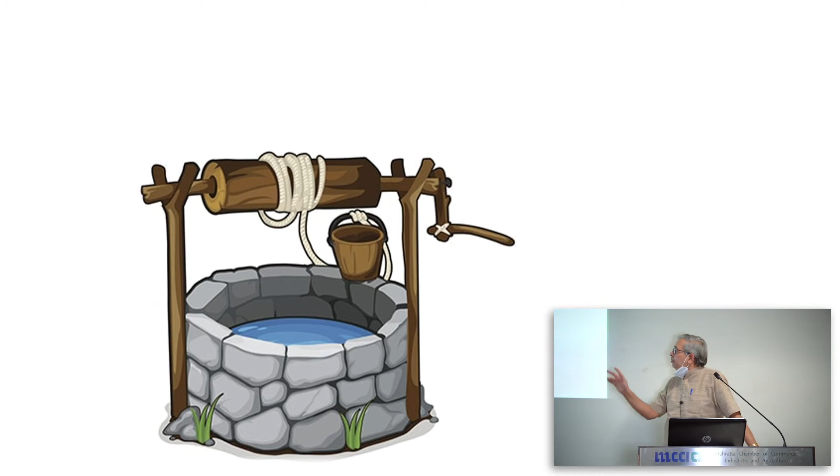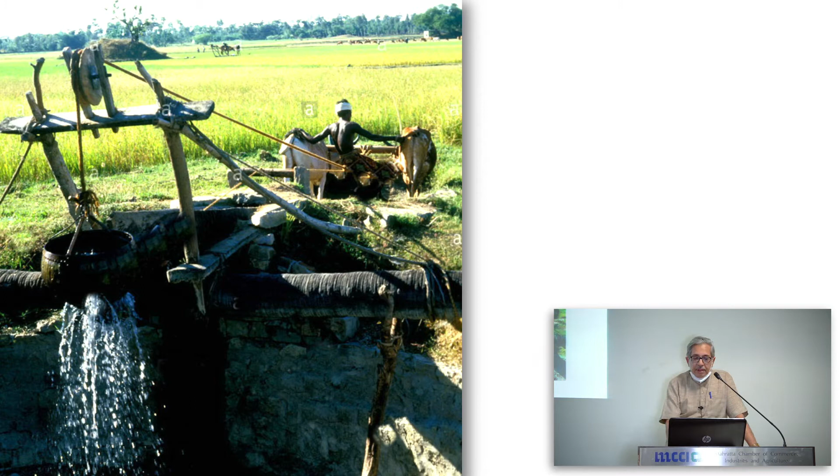If you remember, once upon a time, drawing groundwater was done by a manual method, one bucket at a time. This was the norm. Then for agriculture, oxen were used for drawing the water from the wells. Quantity increased. Then came this machine, a rig, which is, I think, one of the easiest solutions for drawing water. Wherever you want groundwater extracted, you call the rig, they'll put a hole, maybe 100 feet, 200 feet or 300 feet. The bill of the rigs goes up if you go deeper, because the rate is calculated by number of feet.

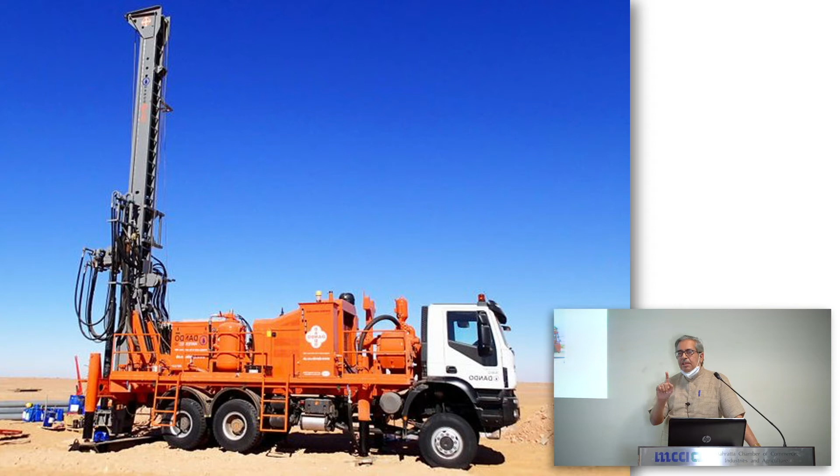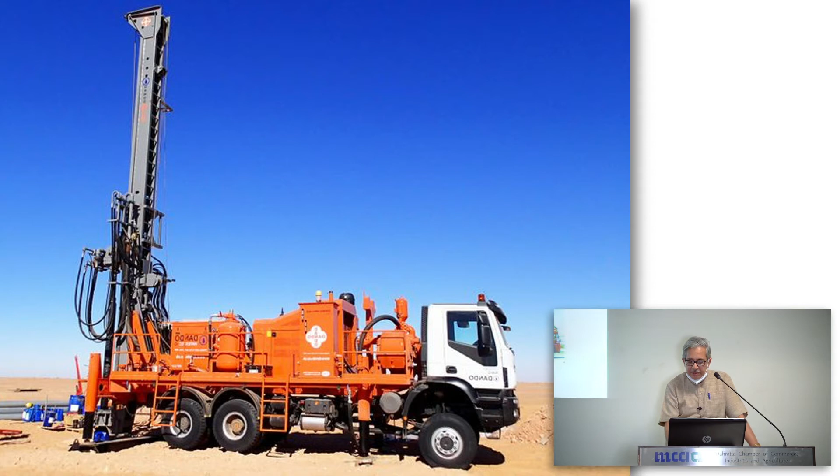If you have a 100 feet borewell, charges are less. But if you have 300 feet, charges are more. So obviously the rig people will encourage you to go deeper and deeper. The borewell is an easy solution for water. The moment you have a borewell and a motor pump on it, you will have a continuous stream of water. In the farm sector, you will find 5 to 6 borewells on just 2 acres of land. If you have 5 hectares, you will have 10 to 15 borewells. I have seen 20 borewells in a 5-hectare land.

This is happening because they drill a hole here, they get some water. Next season it is dried out, so they move, put another hole there, and try to extract water. This way, they are actually emptying out all aquifers. Why? Because, as Dr. Deshpande said, the more water you get, the more cash crops. Instead of being a bajra or jowar farmer, if you have got sugarcane, you are richer. And so the quest for water goes up.

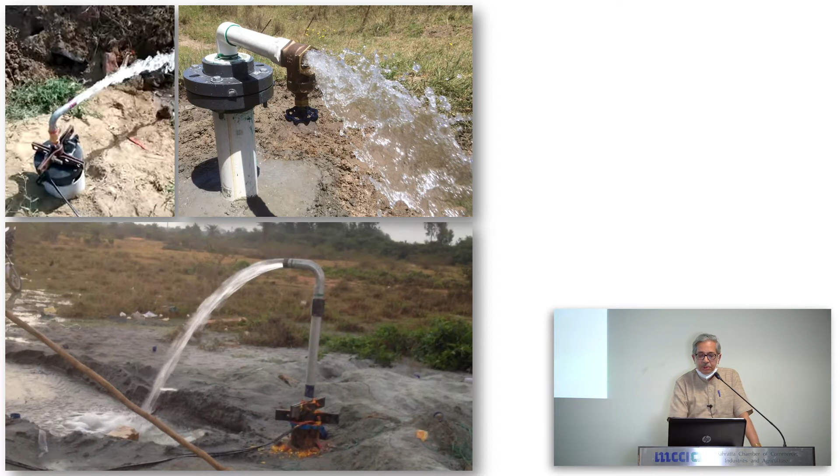Now the same phenomenon is explained here. Look at this. When you had a dug well, the depth was not more than 30-40 feet. Then we had borewells, going up to 150 or 300 feet. And later on the deep borewell, sometimes even 500 feet, or as in Bangalore, 1000 feet. Look at the aquifer levels. When you are using a dug well, you are extracting water from the superficial or upper layer of the aquifers.

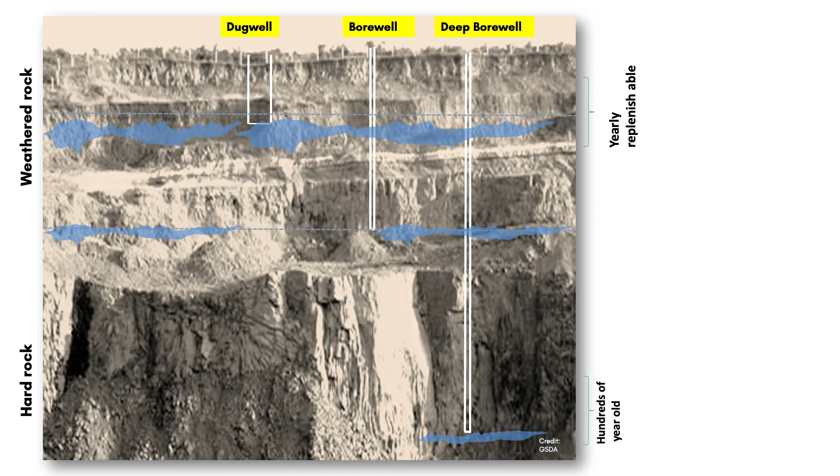But then you get deeper and deeper. My next slides will tell you how it is replenishing. This gets replenished every year. This doesn't. This kind of layer of aquifer might take sometimes 100 years to get replenished. In fact, in Bangalore, they have hit aquifers which are replenished in something like 500 years. And we are trying to empty out everything down there, trying to make everything dry.

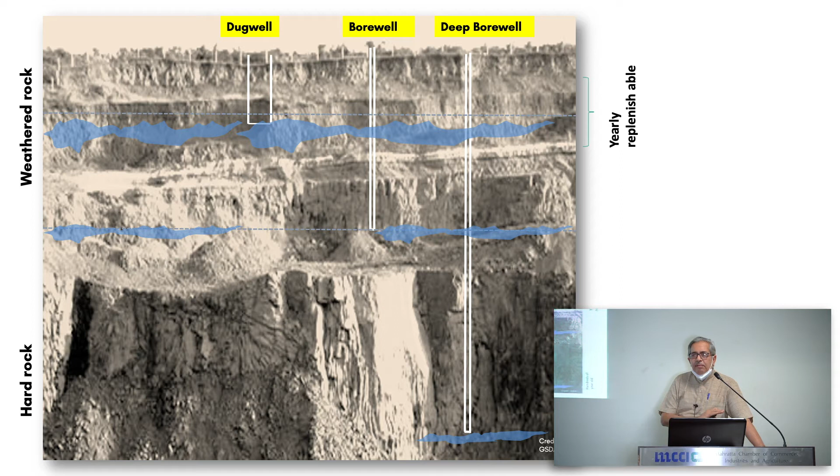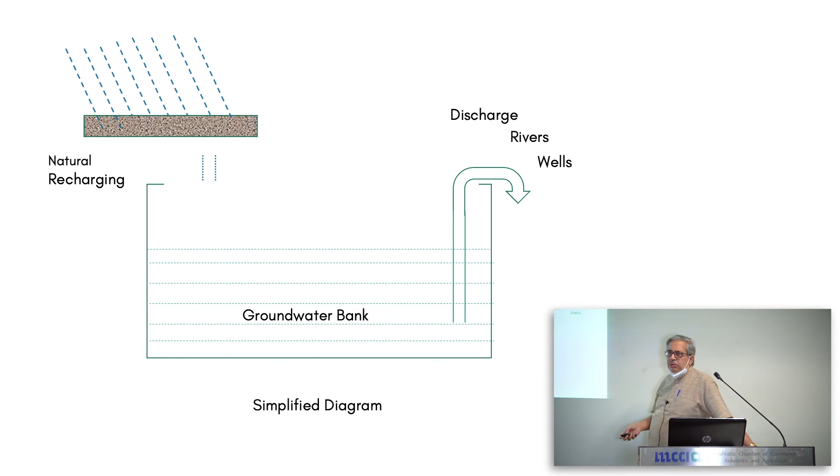Now you imagine that the groundwater is like a bank. What happens? Earlier it was only natural recharging. Look at this, rainfall is very heavy, but actually the water that goes into the groundwater is very small, not more than 15%. And the discharge was through the wells and rivers. That was manageable. The balance was always there.

But this doesn't last forever. Shailaja would be interested here more. The recharging of the rivers is not only because of the surface water, it's also because of the groundwater, which gets replenished over decades, centuries and millennia. And this is all water which actually makes the river flow round the year.

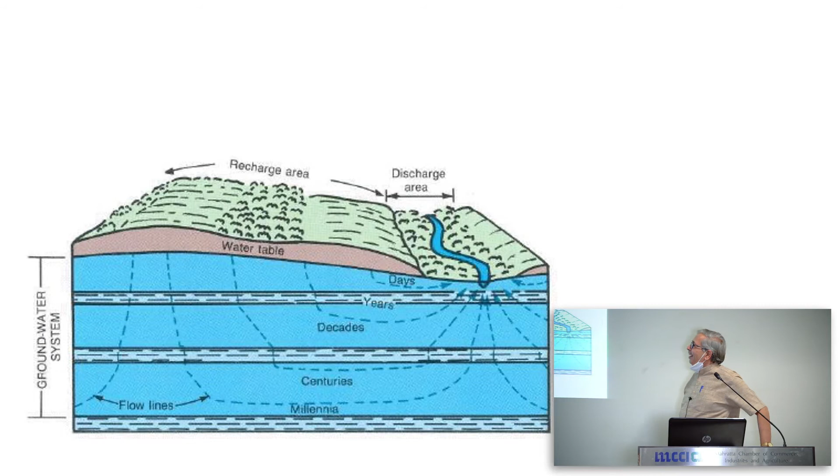Many of us would remember that just 30 years back, Pune had rivers with flowing water throughout the year. And today, there is only a trickle from February or March onwards, if we are lucky. Otherwise not. The situation is the same in almost every city. Go to Yamuna, the same thing is happening there. So this is the situation.

In fact, Mithi River in Mumbai, same thing. It's not flowing throughout the year. Only when there is a heavy downpour does it come into the newspapers. Otherwise not.

In Maharashtra, we have a very peculiar situation where basalt rock is everywhere. I am mentioning this because basalt is a non-porous rock which is laid almost all over Maharashtra except Konkan and some areas. What makes this situation tricky is that this prevents recharge of groundwater. When recharge happens from the heavens, from the rainfall, basalt prevents it. It's completely non-porous. It's impermeable.

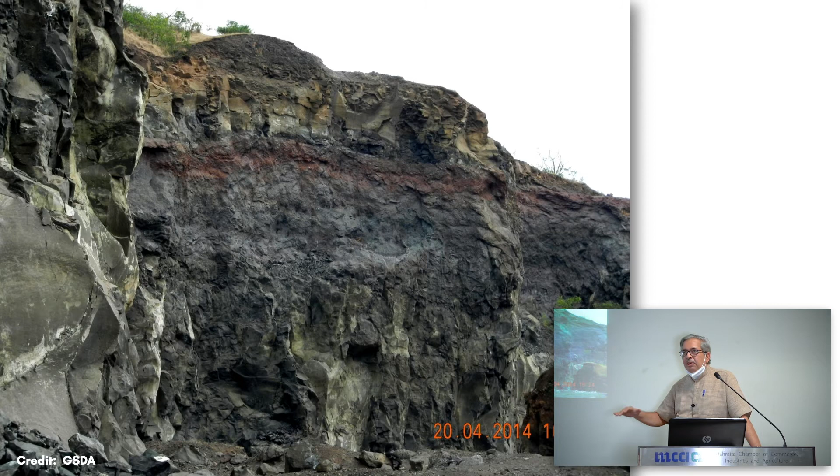Despite this, some recharge does take place because of the weathering of the rocks. That means the rock becomes brittle. Sometimes cracks develop, and because of this, the rainwater trickles down. Remember the word here, trickle. Even though there is a flood of water on the surface, nothing goes beyond the basalt except a few drops. Through the cracks in the rock, the water may go down. These cracks are more visible here.

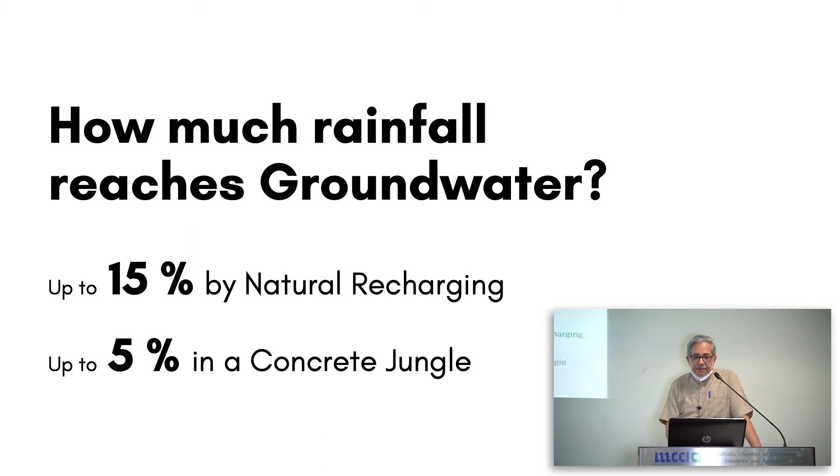And here is the stat. How much rainfall reaches groundwater? By natural recharging, 15%. But in concrete jungles like Pune and Mumbai, cities with concrete roads and concrete buildings, 85% of the city is covered with concrete. When this happens, the recharge in these cities is only 5%. Which are the obstacles? Obviously the buildings and concrete roads, which are impermeable.

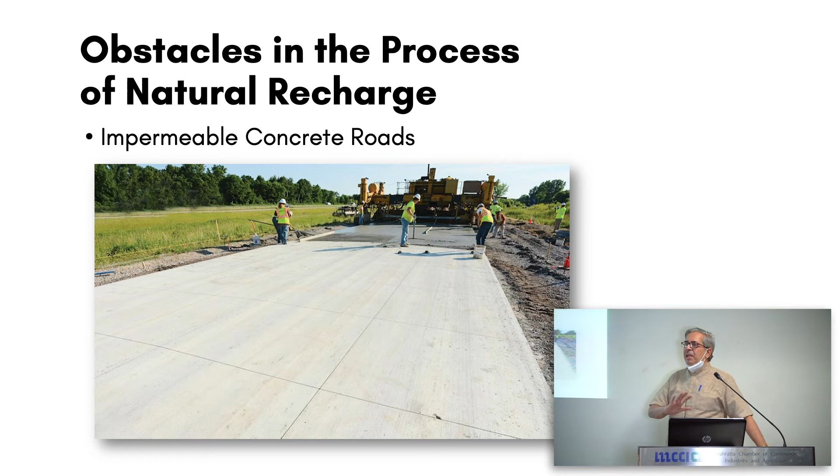This is also the reason why there is flooding every rainy season. We are not allowing the water accumulating on the concrete roads and inside the societies to go anywhere. I have seen hundreds of societies where even their internal roads and open spaces are filled with concrete. I asked, why is there no soil left in the society? They said, in the rainy season there is too much water, our feet get muddy and dirty, so they want concrete there. That makes the case complete. That will not allow any water to trickle down.

And on the other side, we are extracting water from this layer, from dug wells, from bore wells, from deep bore wells, and we are extracting water from a level where the recharging has been happening for centuries.

They, आपल्याकडे इस्टेट असते ना आई वडिलांची, which your grandfather's grandfather has earned and given you, like real estate or gold, and in one generation एक असा सवाई मुलगा निघतो that he tries to sell off everything, all the gold and all the real estate, and just enjoys, because he can't earn, so he throws it away. All of us are doing that. The entire population of India is doing this.

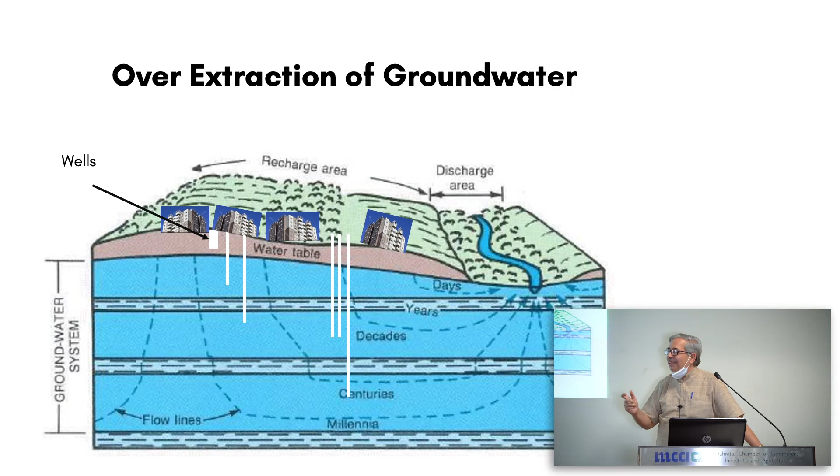So we are trying to draw out all the water which has been collected over centuries and millennia, and we are desperately trying to be completely poor, completely poor. And we are not realizing it, we are just not realizing. We are getting broke, actually, that is the correct word. We are getting broke.

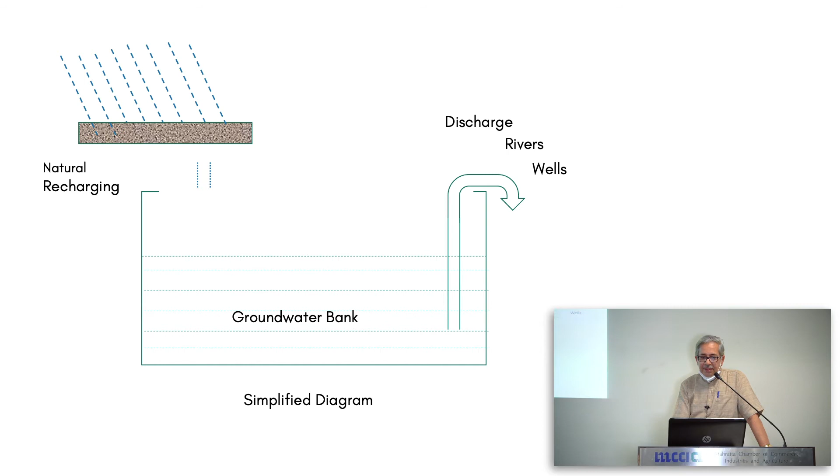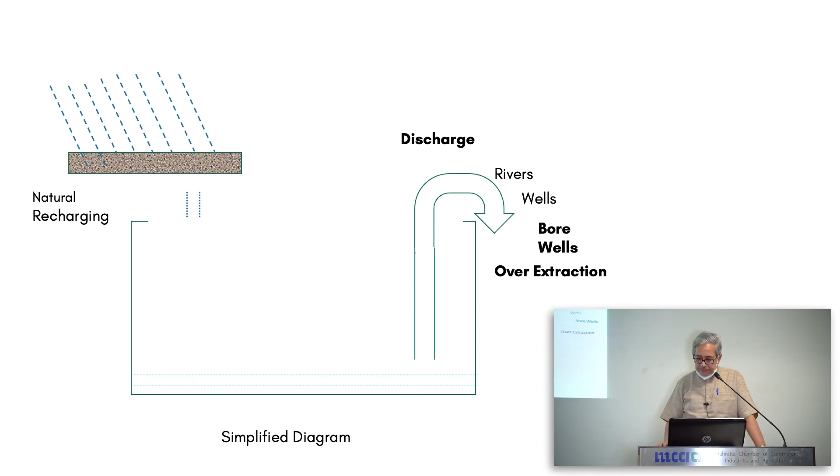And this is the same diagram as earlier, and now what is happening is this groundwater bank, the natural recharging, I have kept the same, assume that this is the same, but extraction has gone up, over extraction in fact. And the situation is this, that the groundwater has gone down. Now, that's the reason recharge is essential.

But when you have got a rig machine which is trying to extract the blood from the body, you need to put the blood into the body again. You need to have blood transfusion. So artificial injection of water into the groundwater level is nothing but a transfusion, which has become essential to survive. Blood is not given daily, only when the life is in danger. But now we have come to this level that we need to give artificial injections.

So how can the recharging take place? Rooftop rainwater harvesting, surface rainwater harvesting, rainwater storage, and lastly, artificial recharge. The first three, I think for the last 10-15 years, the entire Pune city has been doing. In Baner Pashan Link Road and that area, we have witnessed and been a part of that movement, where almost every society has done this kind of method, and our water levels are quite adequate.

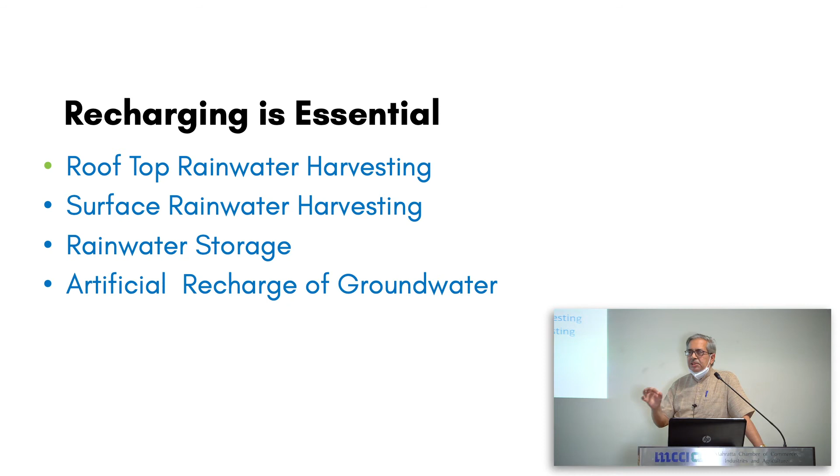In my own society, our borewell used to go dry from February onwards, and we were dependent only on tankers. But we did all this, and for the last 5 years, we have not spent a single paise on water tankers. We are self-sufficient on groundwater as well as municipal supply. I'll just take a brief. This is not something new to anybody here, so I'll just go fast over this.

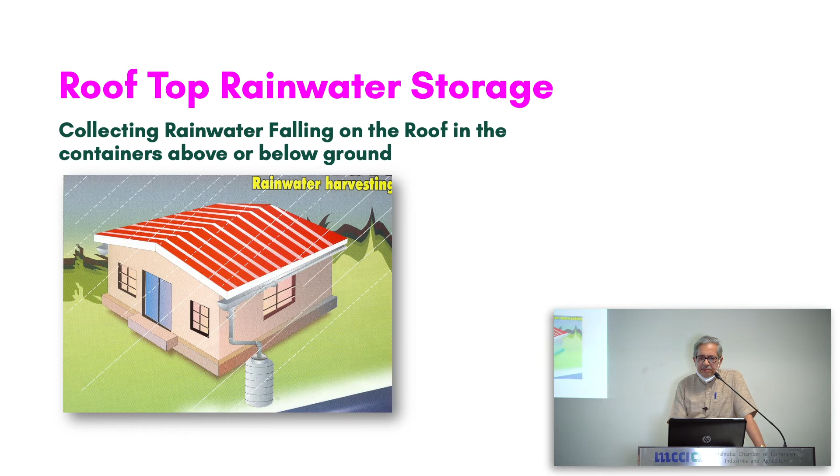This is the way you can collect the rainwater into the tanks. But there is a difference between storage and recharge. Obviously, recharge is better. You can go through this quickly. In fact, I don't want to go through it, this is quite a long one. But I just want to highlight here that water available here will be there throughout the year. In storage, there is a limitation. How big a tank can you get?

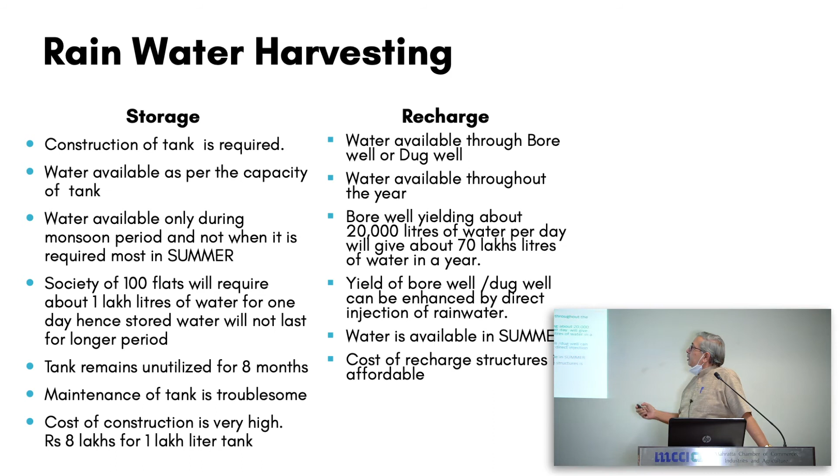You can have a 1 lakh liter tank, but that will not be sufficient for more than a month, because we require something like 5 to 10,000 liters per day for a society. So that will not last, so there is a limit for storage. In Mumbai, many societies have done underground storage tanks. Huge tanks have been built. Maybe the geology is different there, but in Pune, it's better that you do the harvesting through the bore wells.

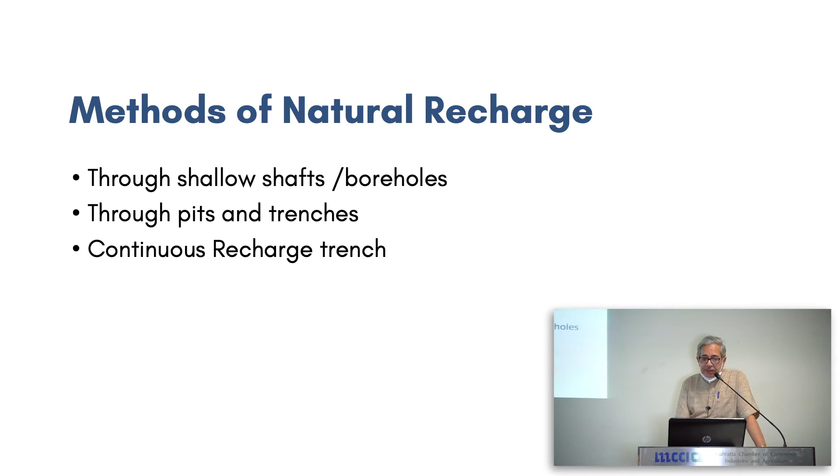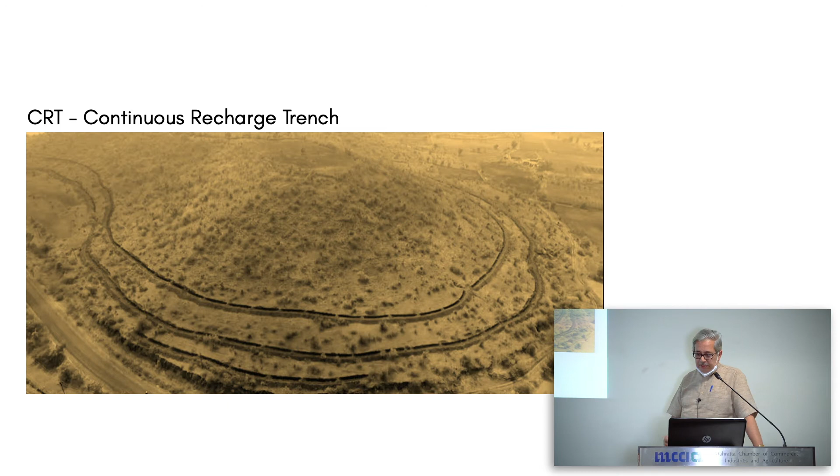Now, the recharging can be done through shallow shafts and boreholes, through pits and trenches, and continuous recharge trenches. This is a classic example. In villages outside Pune, and in Pune itself also, like Baner Pashan Hill, Deepak Shrote and his team have done huge work on trenching of the hill, and that has resulted in a huge groundwater level in the Baner and Pashan area. These are the technicalities of how this should be done.

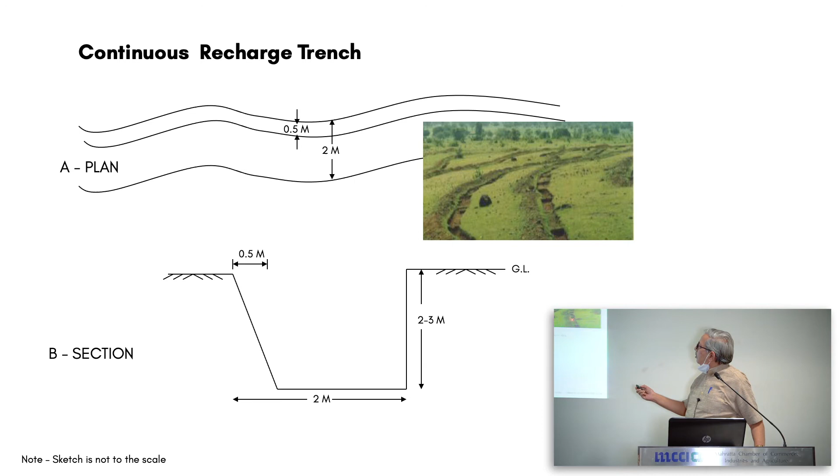On one side, there should be a complete obstruction, so it should be vertical, and it should be slanting. So this is how it is to be done. These are the further details about this: how much should be the length and depth of the trenches and pits. Rainwater flow direction is also very important, and recharge trenches and pits are to be taken on the higher side of the slope. But I'll talk something more about it.

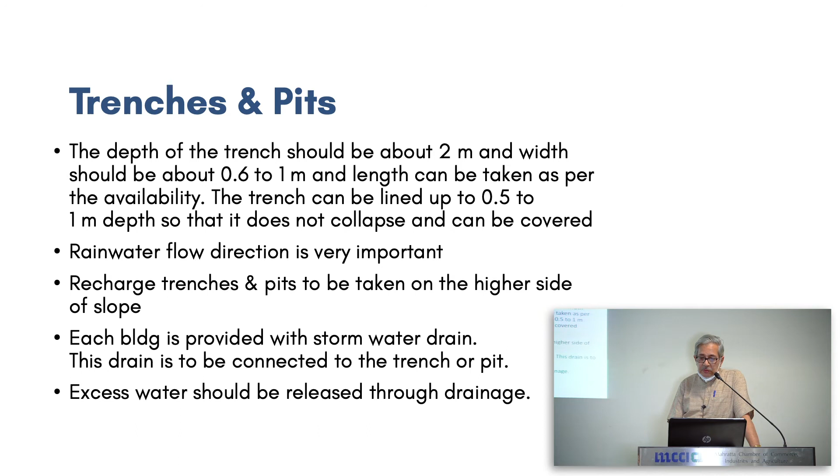These are the trenches, and this kind of thing is done more outside Pune, in the countryside. But here we will be talking about something which is there in our societies, in urban areas, because today's subject is urban groundwater. So let us talk about that. You can do the recharging through the dug well or through the bore wells also, like here. But you can do it through the trenches also.

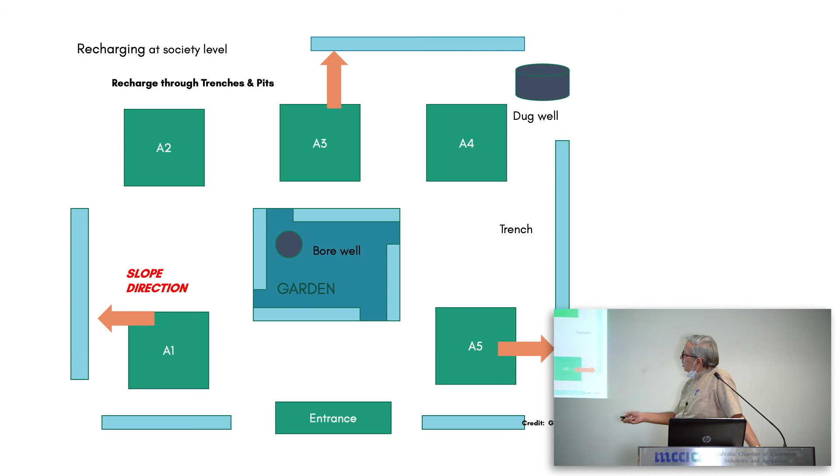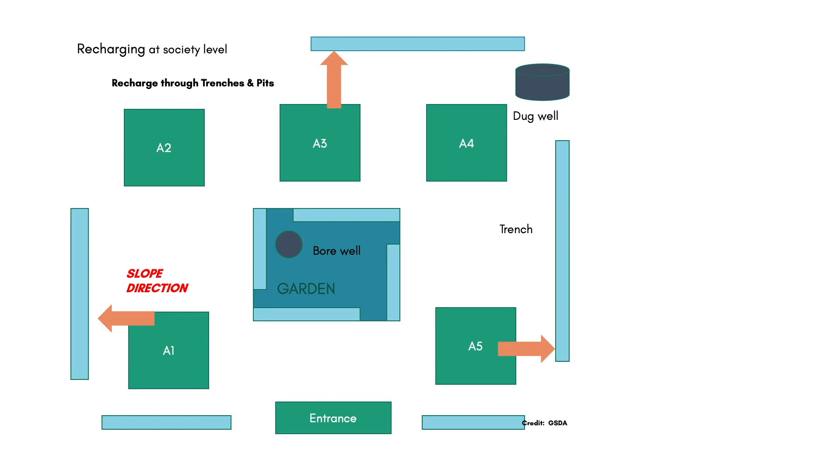You can dig trenches here on all sides of the society, and water can be directed to these trenches. The water which is falling on the roof, yes, but don't allow the sewage water from the buildings, like wash water, into the trenches.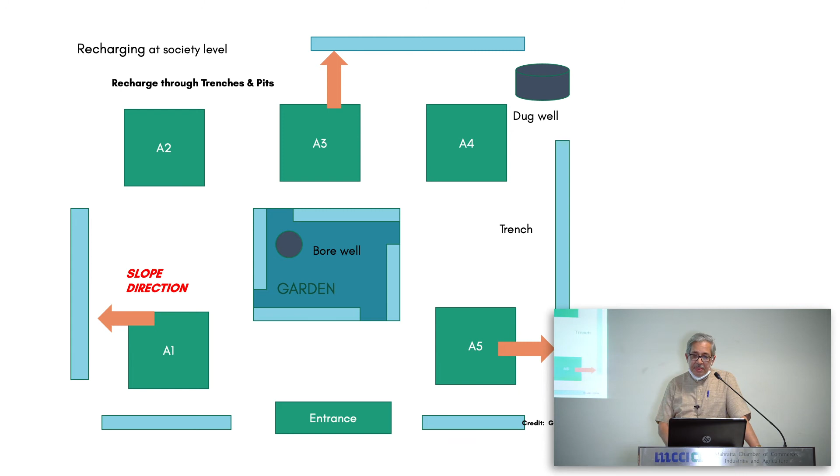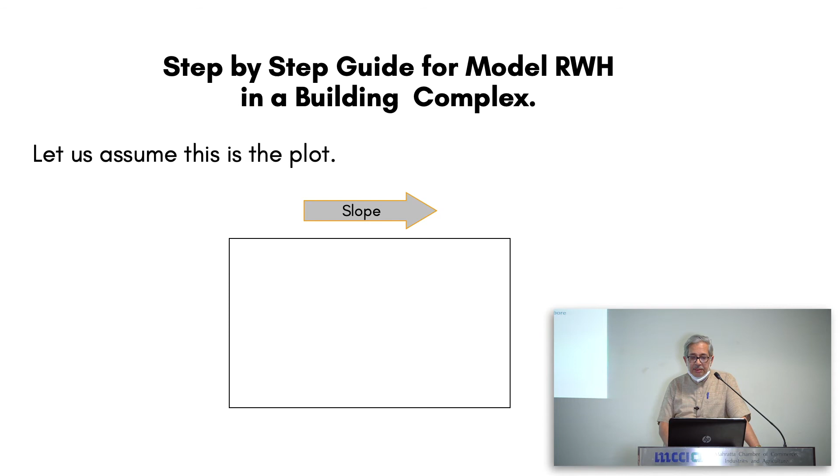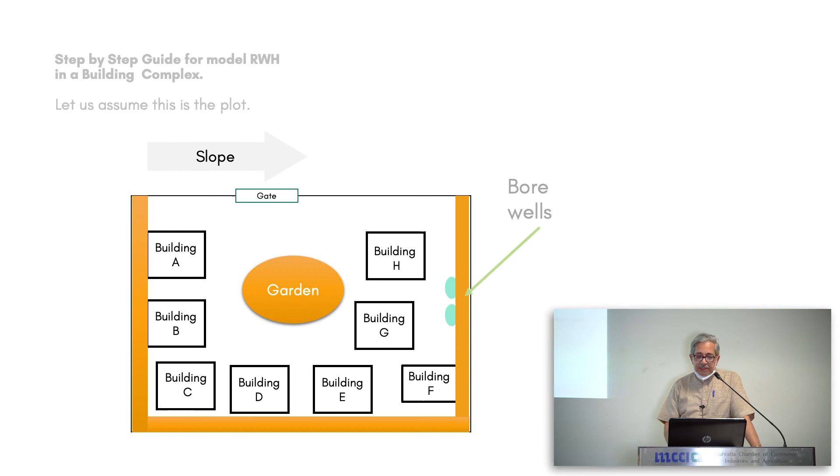Now, this is a step-by-step guide for rainwater harvesting in societies. Imagine that this is the plot and there are 2 existing bore wells. I'm talking about recharging through the bore wells. So these are the buildings, these are the bore wells, and maybe a garden here. And now, the suggested location for the recharge pit. You can have a recharge pit here. A recharge pit, which we'll talk a little more about, is built near the bore wells.

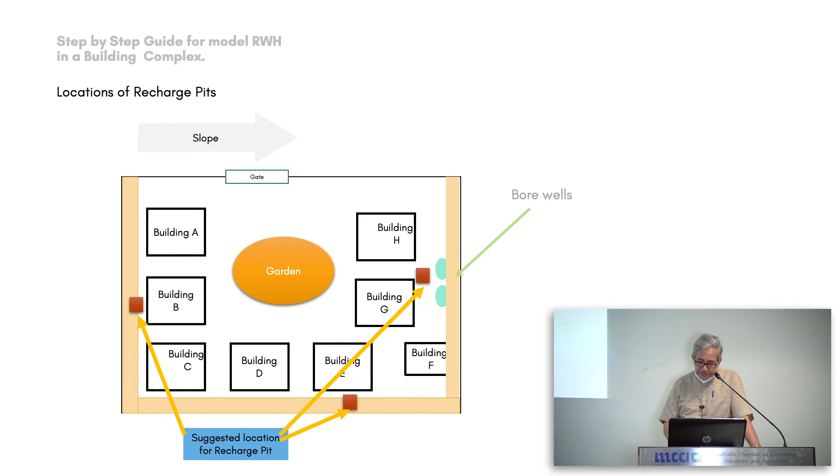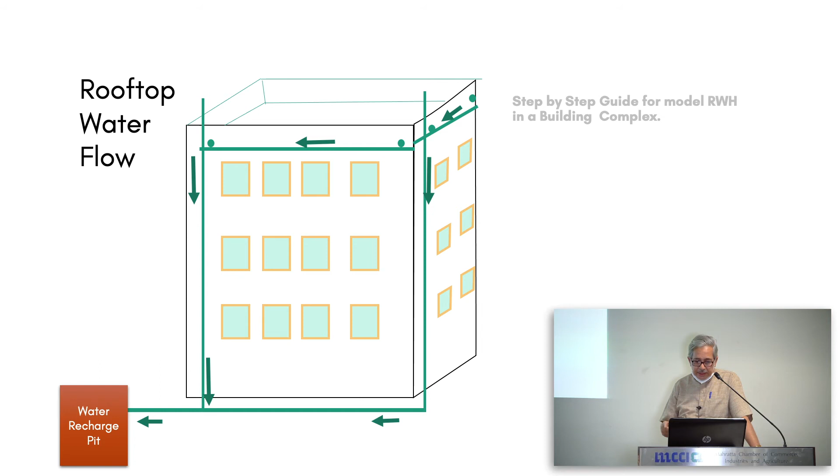And from the buildings, you can collect the roof water through this kind of piping, and then it is directed to the recharge pit. Now, what should be the dimensions of the recharge pit? Here are guidelines issued by the GSDA, and also there is a BIS standard. The BIS standard is something which should be followed, because it is a national standard, that the pit should be 2 meters wide.

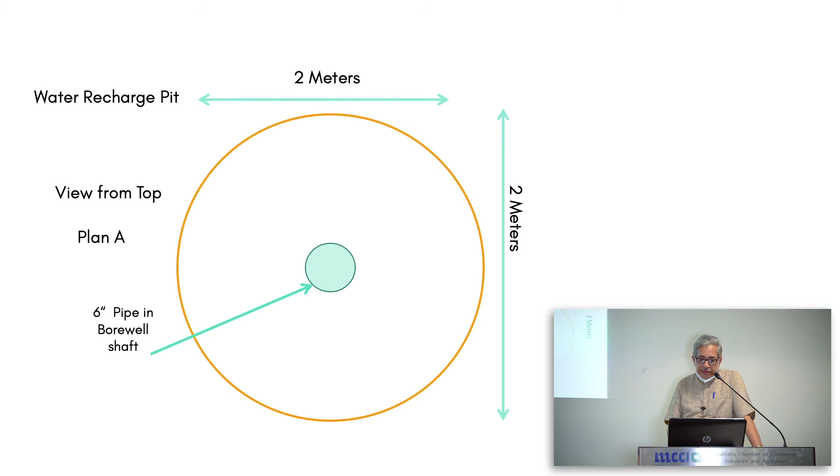There should be a 6-inch pipe in the borewell shaft, and this is how the filter design is, which I think all of us are quite familiar with. The most important part is that this particular design has got a BIS standard. So you can safely use it and follow it almost blindly: there is a wire mesh around the pit here, and sand on the top, gravel in the middle, and pebbles at the bottom.

The size of the pebbles, gravels and sand is also defined in this BIS, and also the width of the pipe here. And through this, the water which is drawn from the roof is released into this particular pit, and that goes into the bore well.

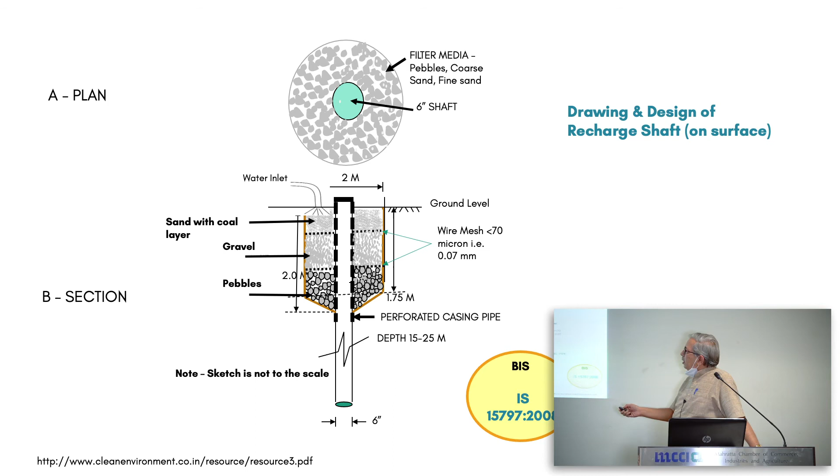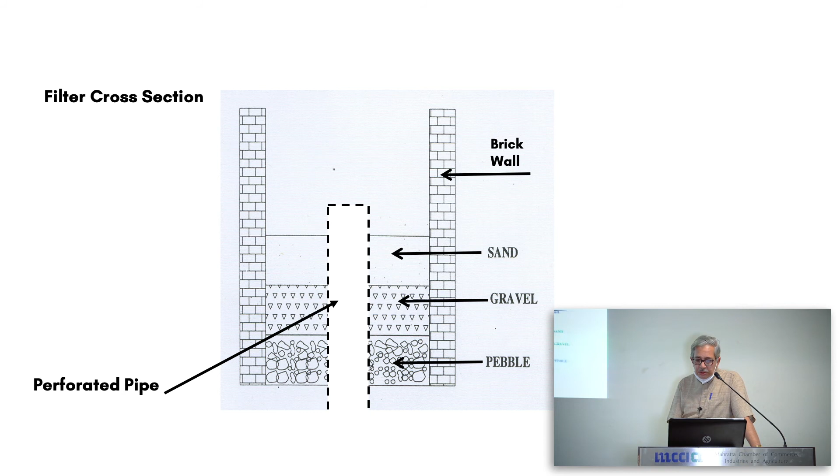This standard is designed for two particular aspects. One is the sediment level of the water. If there is surface water, muddy water, which has got a lot of sediments, then it should not be allowed to go through this filter, but first be settled in a tank. If the sediment load of the inflow is very high, then first get the water stored in the tank, and only the supernatant, the top layer, should be allowed through the filter. So it's a double way of ensuring that only clean water is there.

Here charcoal is added. Charcoal plays a very significant role, especially when the water is coming from the road, where there is contamination from metals, diesel, petrol, and many other obnoxious gases and poisonous substances. Most of those get absorbed into the coal. Coal, almost a natural substance, absorbs almost every poisonous thing, and that's why only clean water goes inside.

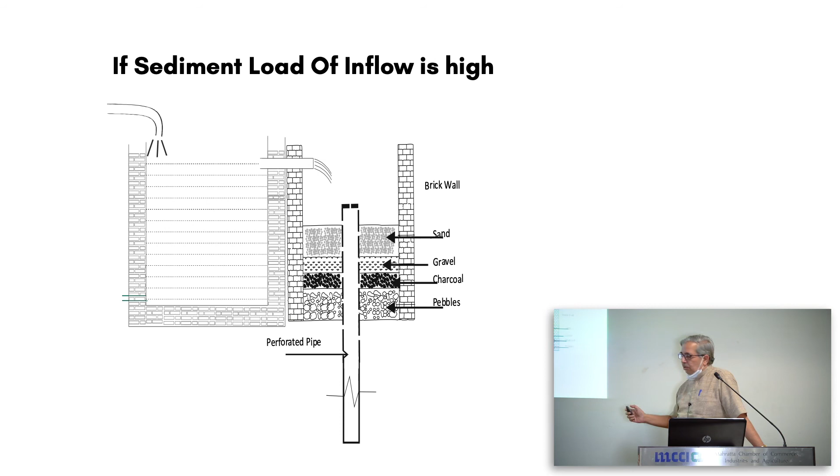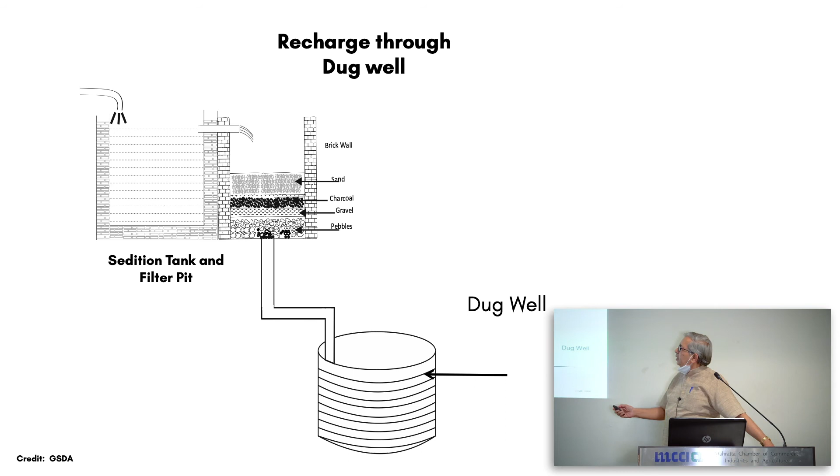So once this is completed, it looks like this. The recharge pit is there, and the same process can be followed for recharging of the dug well. Exactly the same. You will find that the whole structure is there. And in fact, in my own society, I have taken in the water flowing from the road also.

My society is on a slope, so huge water comes after every rainfall. So our society has created a pipeline which takes in all this water, releases it into this kind of sedimentation tank, and then it goes into the filter and through to our bore well. So this is a very safe kind of structure.

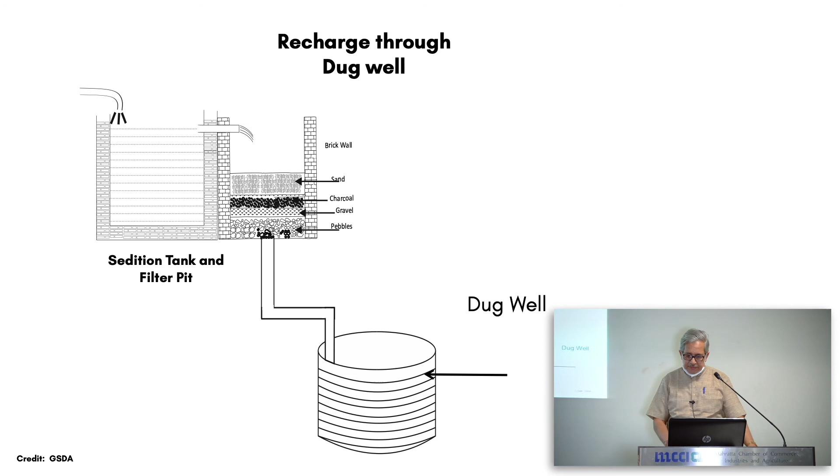Now, these are the most important aspects in having a rainwater harvesting structure. The location specific structure is something which I want to highlight. Filter is already talked about. Storage capacity of the aquifer: I think since morning you have been listening to talks about aquifer storage. So what is a location specific structure? Let us look at this.

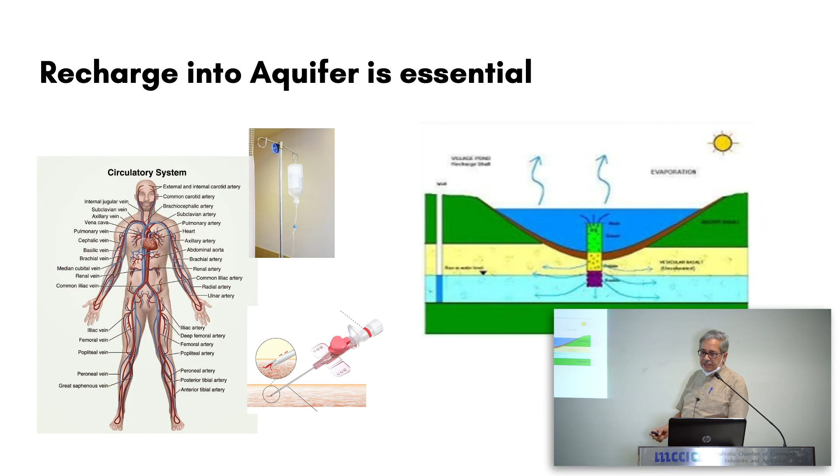Recharge into the aquifer is most essential, and here I am giving you the example of a body where the blood flows all over. If you prick anywhere in the body, you will get blood. But though blood is everywhere, you still have a circulatory system, veins, and when you want to give a saline or glucose injection, you can't just insert it into any part of the body. You have to locate a vein, and only through the vein can you discharge it. Something similar is there: you have to locate the aquifer for recharging into the aquifer.

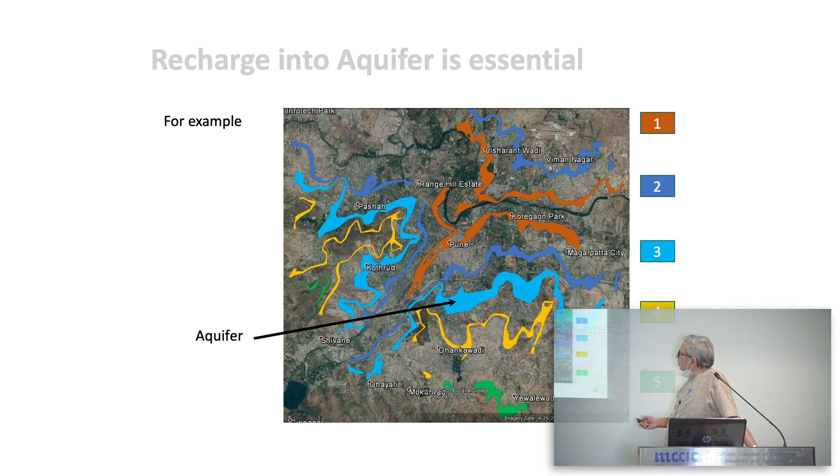Now here is an example. Just imagine that this is the aquifer. This is the actual map, taken from the ACWADAM study, and let us see what happens.

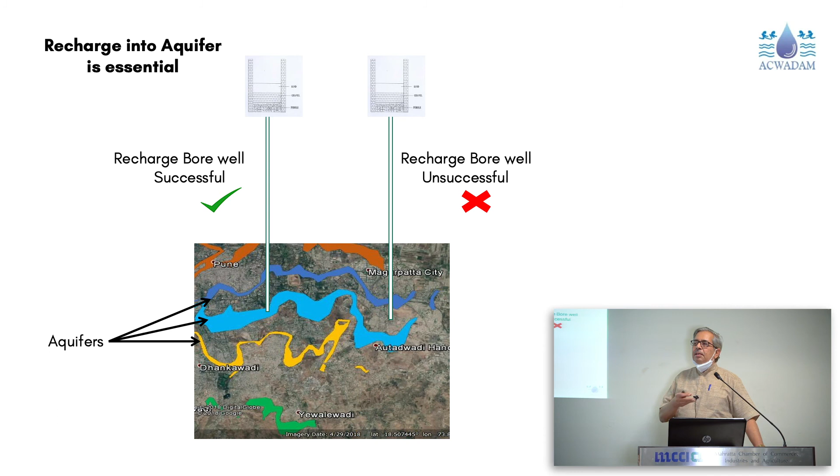Water cannot be injected into the ground just as it is anywhere. No, it has to be put in the aquifer. Then only it will be stored well, and intake also will be much more. In fact we have an example next to our society where they are trying to inject water through rainwater harvesting, and they say that the water flows out from the bore well, it's not going down. It's just because they have struck it here, they didn't strike it in the aquifer, and because of this the water is not going down, it's coming out all the time.

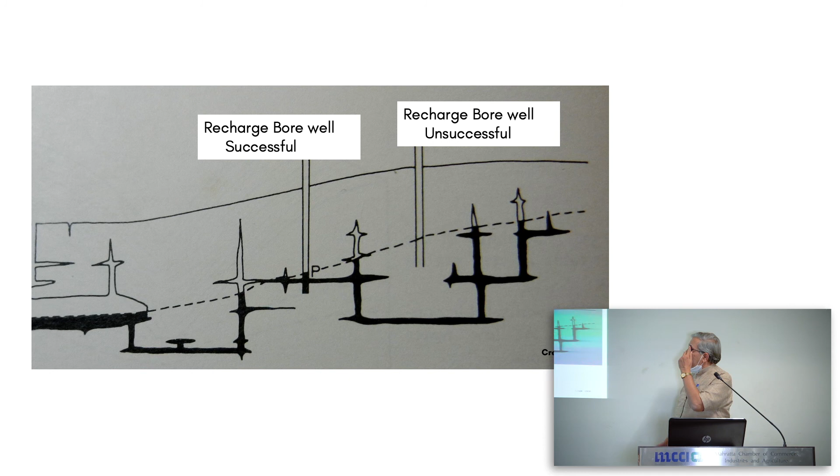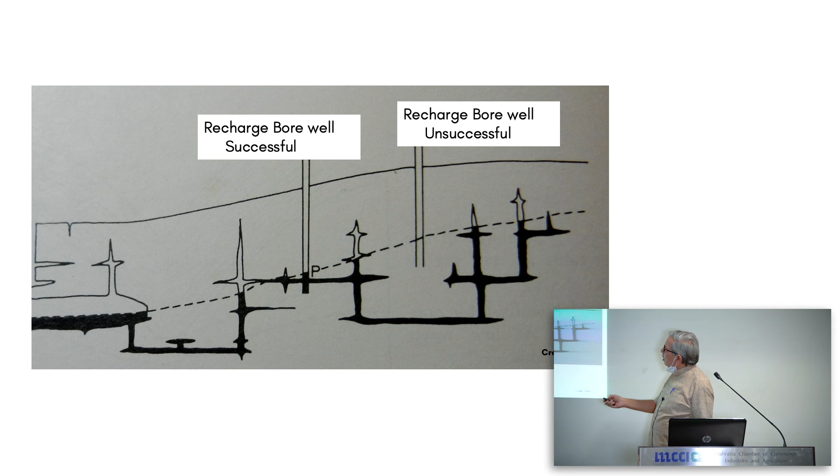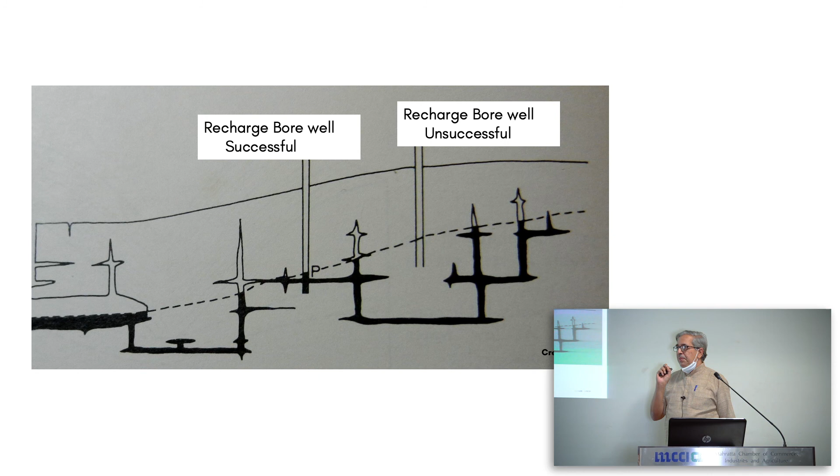Now here the same concept is explained in this way. Again, you have seen that the aquifers are not in one level. Sometimes they are deeper, sometimes they are connected, sometimes they are not connected. So here also, at the same height, if you do it here, it will be successful. But if it doesn't strike the aquifer here, it will be unsuccessful. So what is the moral of the story? The moral of the story is that you have to study aquifers; you can't just blindly have a bore well and start putting water inside. You must try to locate the aquifer.

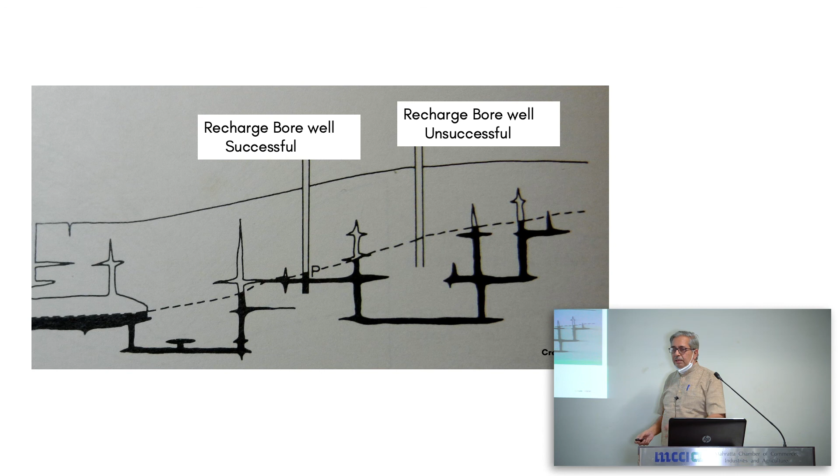And so here earlier it was said: anywhere but not everywhere. This is what is important. You can have it anywhere, but not everywhere. Because in my society we have got huge aquifers down below. But the next society doesn't have an aquifer, and that's why the water is flowing out. Ravi may be recalling this, in our society, Vaidehi Saket society.

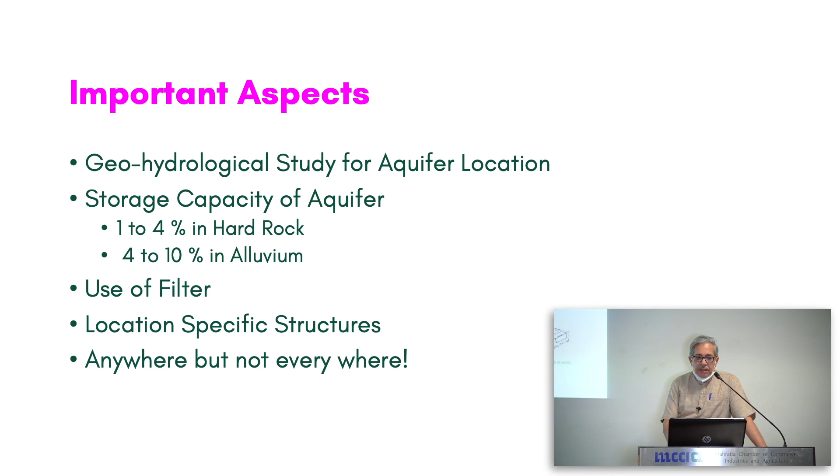Now among the artificial recharge processes, there is another big one: permeable surfaces for roads and pavements, which is a big topic discussed only at activist and scientist level. It's not reaching the decision makers, policy makers, and implementers, because they just don't want to understand this. They just want to follow the road guidelines, have concrete roads where permeability is zero, and the water which flows over the roads just goes down and creates floods somewhere.

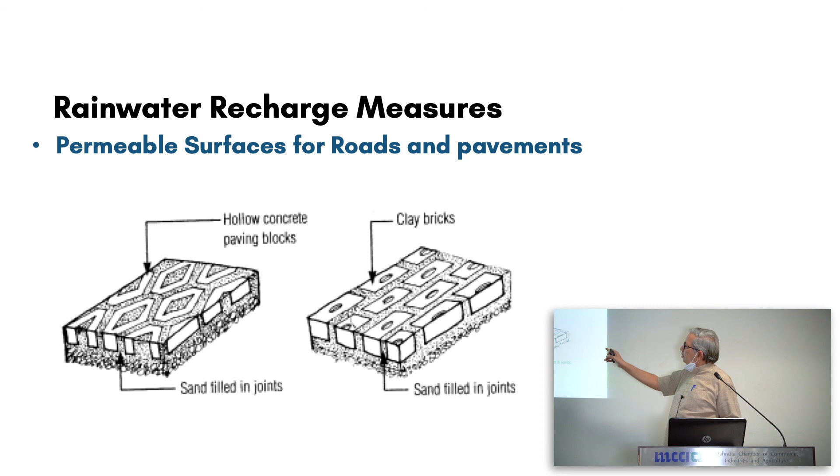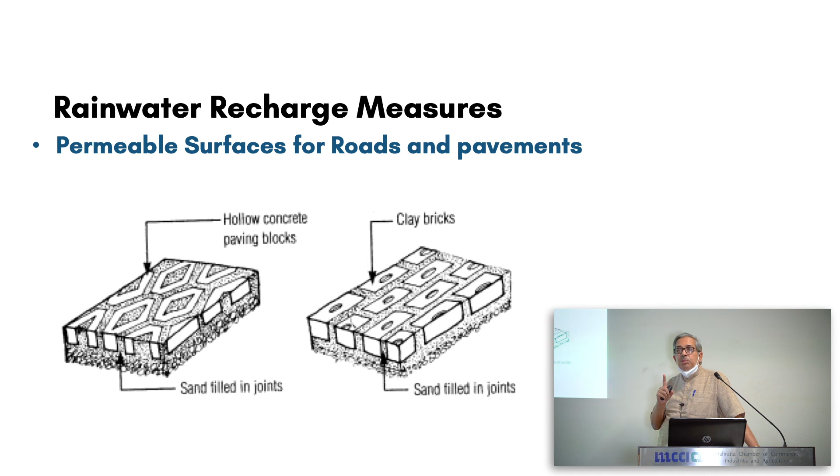If we have these permeable structures in place of concrete roads, of course road engineers and hydrogeologists will have to sit together to achieve both ends, because road engineers also have a responsibility not to allow seepage of water underneath the road, because the moment water accumulates underneath, the road gets broken up. So they'll have to sit together and find a solution. But this is a gray area for most of us.

The point here now is that demand for water is increasing, but supply is constant. Our rainfall has not increased. In Pune, the population has gone up from 10 lakhs to 80 lakhs. So let God increase the rainfall for the Pune area. It's not happening. It's going to be the same. If you take a 100 years or 1000 years average, it's not varying much. Possibly it's going less many a times.

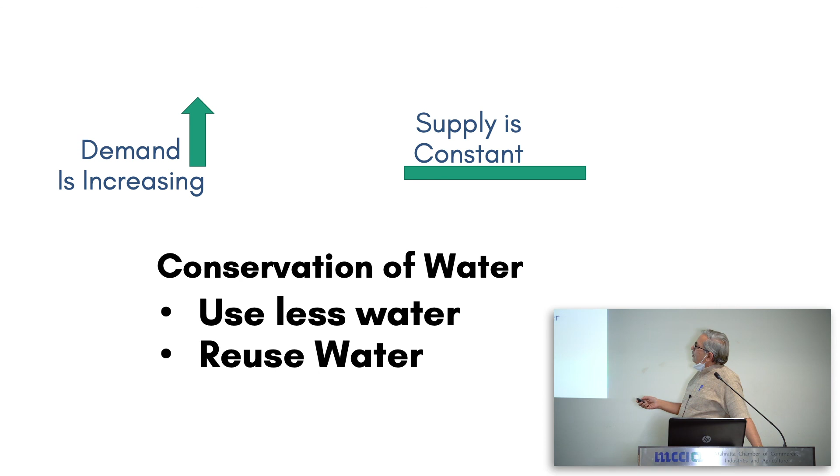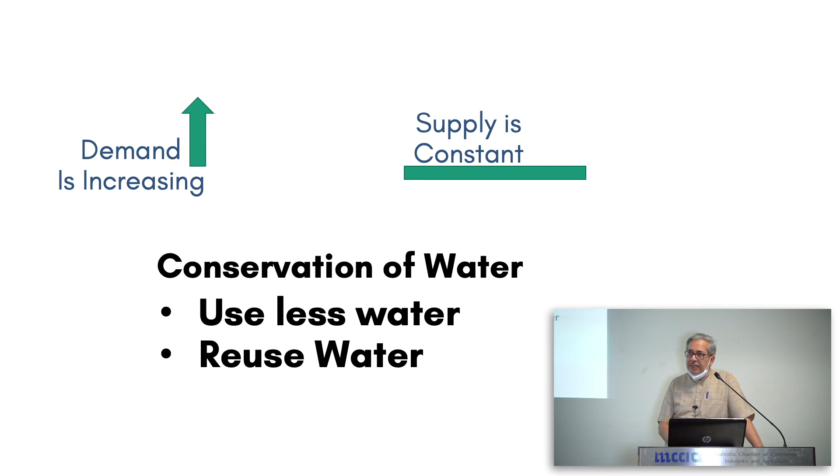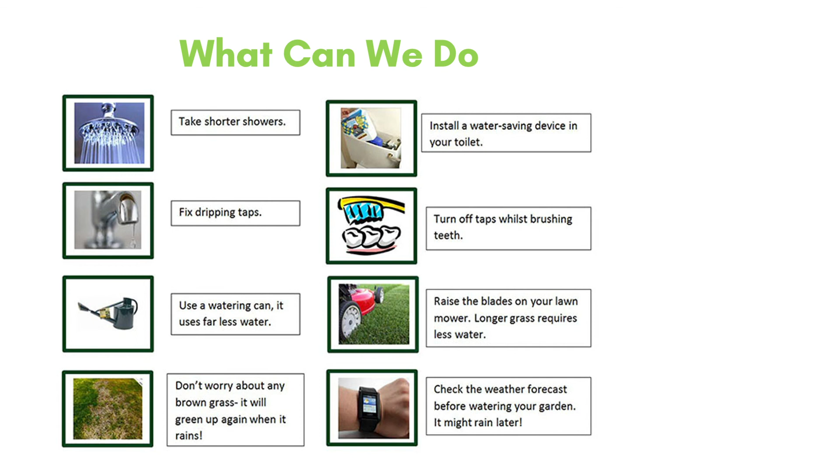So ultimately, you'll have to go for conservation of water. Whatever water supply we make to the people, if they don't use it conservatively, there will be wastage. So use less water and reuse water. What can we do? Use less water, take shorter showers, fix dripping taps, use a watering can, turn off taps while brushing teeth, install a water saving device in your toilet. So many measures, I think all of us know. But I am sure very few of us, from this hall also, have been doing this. This is the reality.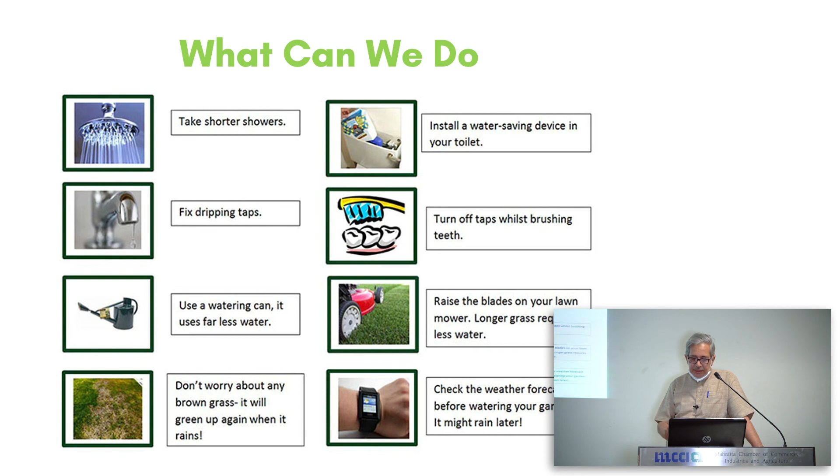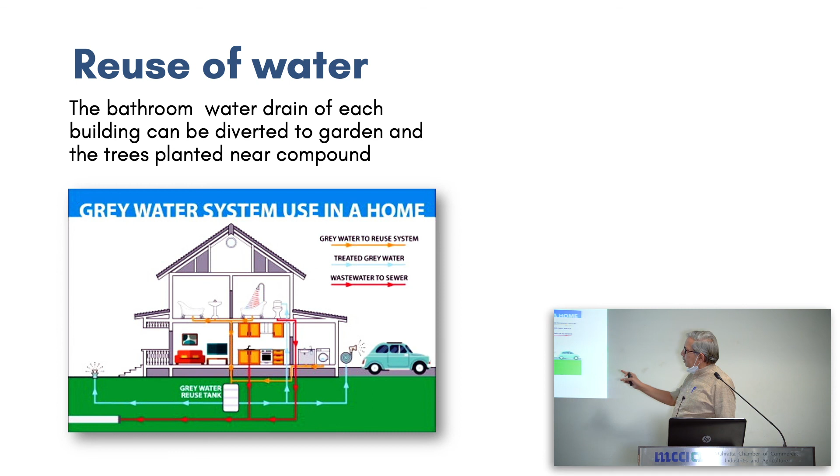Save water while washing the car, use less water, or in fact only mop it, fix a dripping tap, reuse water. This is now happening. I saw one society where the builder has created a structure where he has connected all the water pipes, and then he has tried to make use of it.